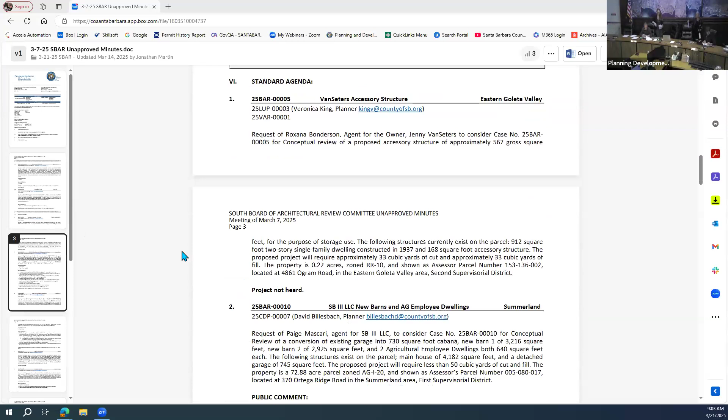I have a couple of comments on item 2H. Let's see, where are the minutes? To read, eliminate 'the way consider' and say it as 'provide overhangs and or shade structure at employee dwellings.' You got that? Is item 2H, comment 2H, right?

So just to say provide overhangs? Yes, just say provide overhangs and or a shade structure at employees' dwellings.

Okay, on item C, 6D, let's see, what did I have here? 6D, again, on 6D, consider eaves or shade element on guest, 6D, on guest house. Similar idea. Instead of incorporate, just consider eaves or shade element on guest house.

And 7E, it's a little bit, the wording is a little bit off. Consider, let's see, excuse me, that's 7E, 7E, 7E. No, from this other side, okay. Yeah, great, yeah.

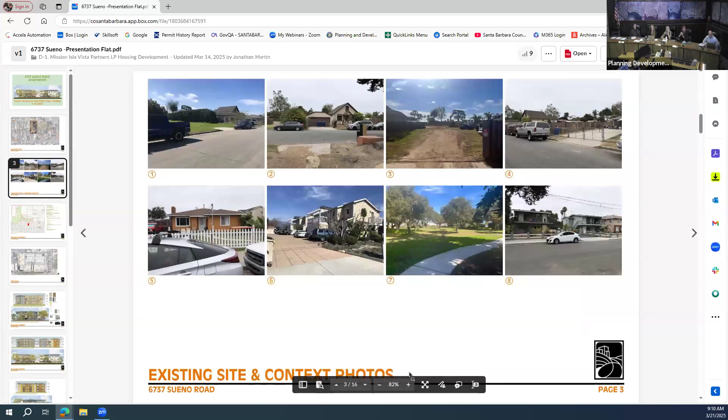Next slide. So here's some photos. The top 4 photos are of the subject property, currently developed with a single-family home and a 2-car garage, and the lot is relatively underdeveloped. If you look at photo 5 in the bottom left corner, that's representative of the scale of most of the structures you'll see west of the property. Photo 6 is a 2-story multifamily structure directly across the street. Number 7 is the park space you'll see to the east of the site. And 8 is further east of the site, 2-story multifamily structures that you'll see on the street.

Next slide. So a little bit of context. The project was submitted in January of last year. A formal application was in February. It was deemed complete 6/28/24. It went to Planning Commission last month. So the project isn't subject to the recently adopted objective design standards since it was deemed complete prior to that. But in this redesign, we have looked at those and tried to implement some elements that we could, to try to make the architecture better.

So the base density of the site is 11 units. It's in the student residential medium density zone. And if we look on the map, it's kind of hard to tell, this is from the city's GIS, but the majority of the properties around it are within that density level. If you get more towards the northeast, you start getting into the higher student residential density zoning designation. You can also see there's quite a bit of recreation zoning around the property. So we are proposing to use state density bonus to get our density up to 16 units. We are also utilizing 3 state density bonus concessions on setbacks, height, and bedroom density.

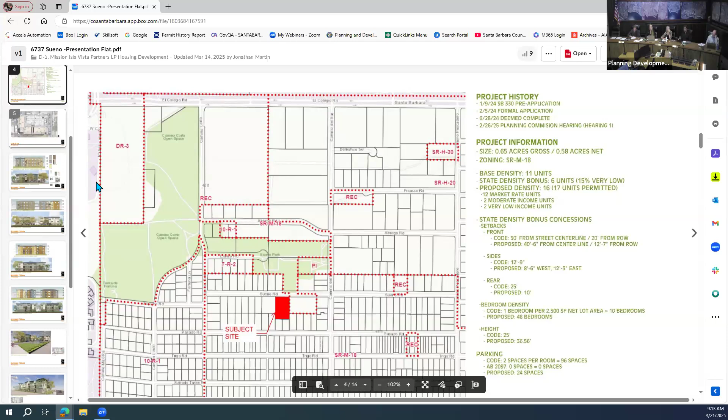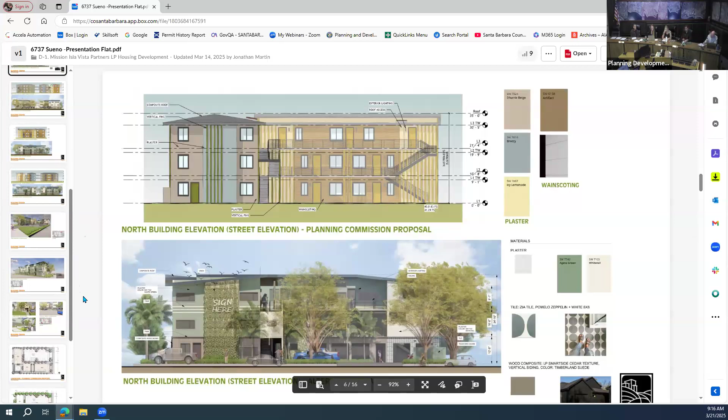This is the street elevation, which you'll see from Sueño. The articulating element that pops out closer to the street was revised to have a green wall element to it.

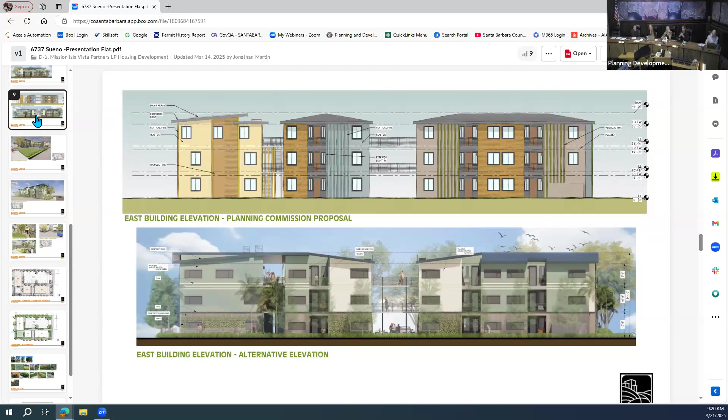You can also see some green wall elements at key gathering areas — in the rear corner there's a green wall element on the wood base material, and also between the two buildings where there are bike racks, there's a green wall element to help soften the architecture. You can also see the ghosted-in trees planted along here to screen and soften this elevation.

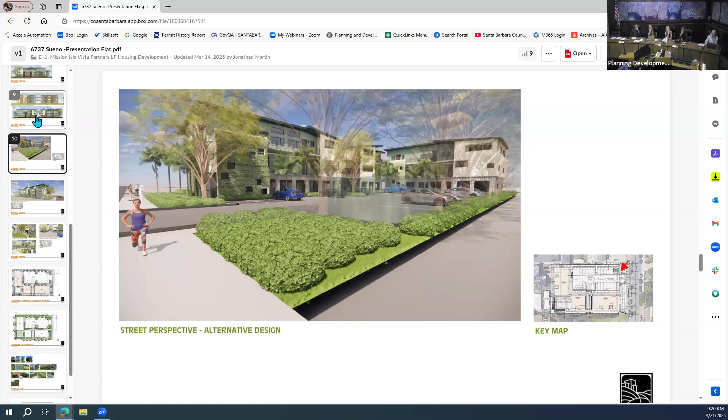And then you can also see a better representation of the proposed design. Next slide.

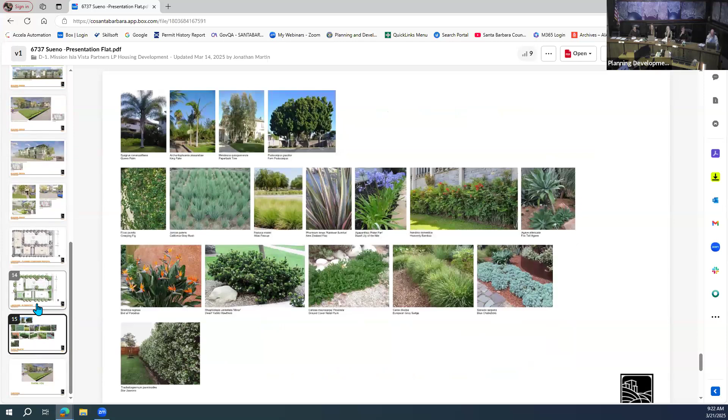So here are images of the plant palette. Next slide. And that concludes this presentation. So we have plans of the original proposal uploaded, and then a lighter plan set of this revised proposal. It doesn't have the floor plans because those weren't really changing in this proposal. So we can go through those if you have any questions.

Sounds good. I realized I didn't read the full project description, so I'll go ahead and do that now, and then the staff memo as well. So at the request of Lonnie Roy, the agent for the applicant, Mission Isla Vista Partners LP, for voluntary review and recommendations of case number 24 DBP 00005 and 24 CDP 00021, the Housing Accountability Act and SB 330 project for the construction of 3 new 3-story apartment buildings totaling 15,213 net square feet. The project includes 16 residential units, all 3-bedroom units, a management office, and will have a maximum height of 36 feet 7 inches, 24 parking spaces, 48 bike lockers, and 52 bike racks will be provided to serve the development. Other site improvements include a trash enclosure, 2 6-foot tall gates and/or fencing, clustered mailboxes, clustered parcel boxes, concrete flatwork, and landscaping. The grading will include 413 cubic yards of cut and 75 of fill. It's a 0.65 acre parcel located at 6737 Sueño Road in the Isla Vista Community Plan area.

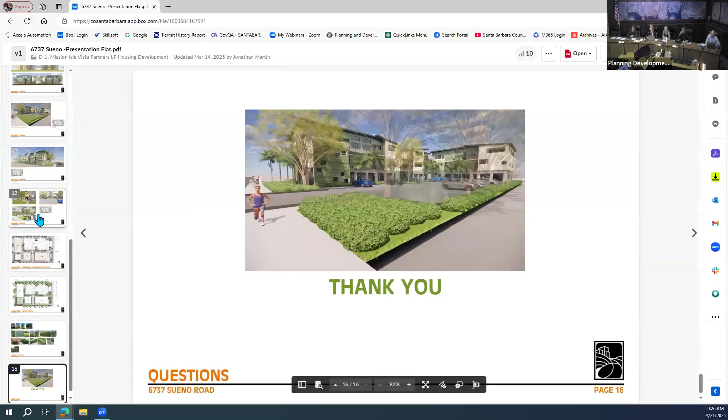So there's two elements. The green wall elements in the parking lot would be a creeping fig, so those would be self-clinging to the wall. That's because it has kind of these random openings, and we thought that material would be easier to maintain for that application. The green walls on the composite wood base material would have some type of trellis element.

And those are proposed as star jasmine. The trellis would be separated from the wall. In the renderings, it's rendered more as like a wire type trellis system.

Yeah, so it would be projecting out a little bit from that material. The base material would be like board and batten, or just a vertical plank. It is proposed as a composite as opposed to a natural wood, just for durability purposes.

Okay, thank you. I have a question. Are you guys planning any type of site walls around the property line, or are you relying just strictly on plant material for the south, east, west? So it's currently proposed to reconstruct the wood fence along the property line, a 6-foot high wood fence, and then we would have plant material interior from that. Okay, thank you. And the next question: is there a plan for a security gate going into the parking lot? There's not.

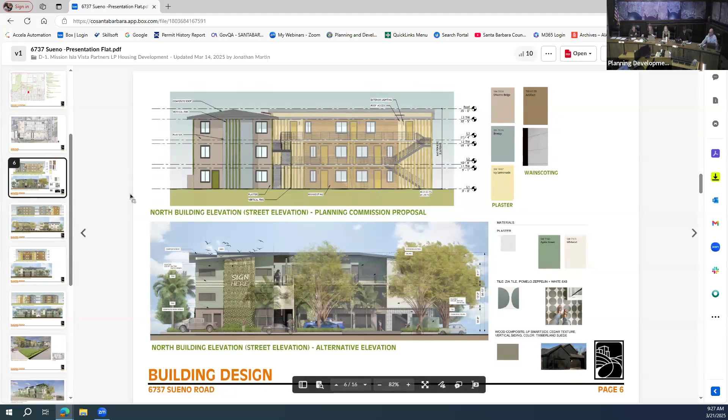I have a question too. Jonathan, can you go to the site plan? So what are the properties immediately to the south? So they're single-story structures, I believe. Single family residence?

If you go to the other aerial, I think yes, I believe they are. And to the west as well. Correct, yeah, so it's single family, surrounded on south and west by single family. Correct, yeah, so that's why we try to put most of the massing on the east portion of the property to kind of separate that as much as we could.

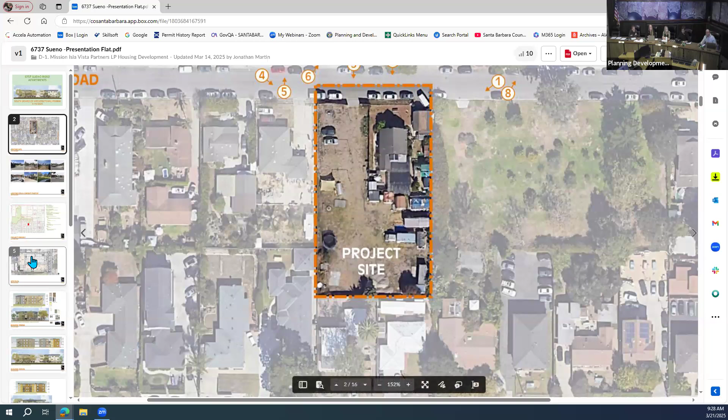Thank you. I have a question. Could you go to the site plan, please? On the south end of building 3, with those concrete walks that go right up against the fence line, how is that space accessed? So you can see kind of the indents there, so there are private patios on those ground floor units, so those would be private patios for those units. So the patio extends into that concrete walk all the way up against the fence line?

Correct. There are planters at each corner with proposed podocarpus there. But that area labeled as concrete walk, is it to be used by the people that occupy the unit with the private patio? Yeah, you're talking about at the direct back, the further south property line? Yes, so essentially it's like a large private space for the occupants of those units. Thank you, just one more question.

Are there other community or public spaces for these residents besides the artificial turf zone that you guys are showing? Is there any elevated areas for that? There isn't currently, no.

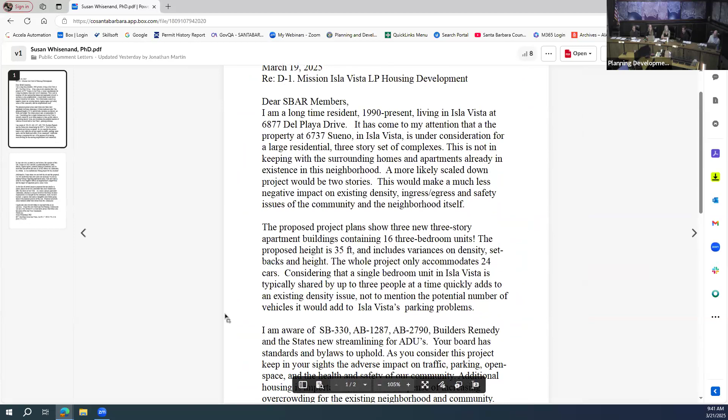Okay, this is Susan Whisenand, sorry. Similar concerns with the height. Scroll down. Keep scrolling. Okay.

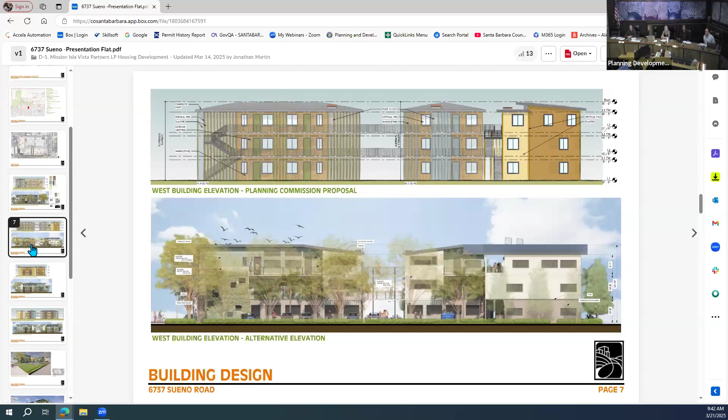Thank you. All right, we'll start with Alex. We only have two architects here. Can we go to the elevations? I think—what is it? Yeah, I do agree that the revised proposal is definitely a better design. It makes more sense. Sometimes it's hard to see exactly what you're showing because of the trees. But clearly it's better organized, more the use of materials—it's just not so much the 60s look that the other one portrays.

If you go to number 7, okay, yeah, if you can blow up a little bit—yeah, go to the bottom part. There you go. Yeah, the base material, I wonder if you ever thought it could be used like a brick veneer. It's not that much more expensive, but it does seem more appropriate. Usually wood is considered weaker or lighter than masonry, than plaster, and sometimes when you see this combination of materials—plaster, and the wood is the one that goes on top—in this case it wouldn't work because it would be a lot of wood. Maybe you may want to use a different base material.

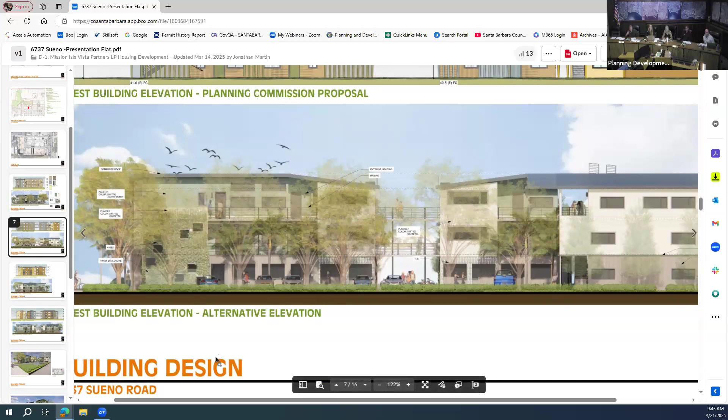If you go to number 8, the next one—where are the vignettes? Where are they? How about where are the ones with vignettes? Let's see, is that one there? Keep going, keep going.

No, maybe they're in the other set. Okay, well, it's the width of on the first floor on this side, you have an interesting stone tile pattern.

I think it's a very good idea. When you have a picture of the side of this building, it shows that colonnade, those pilasters seem weak.

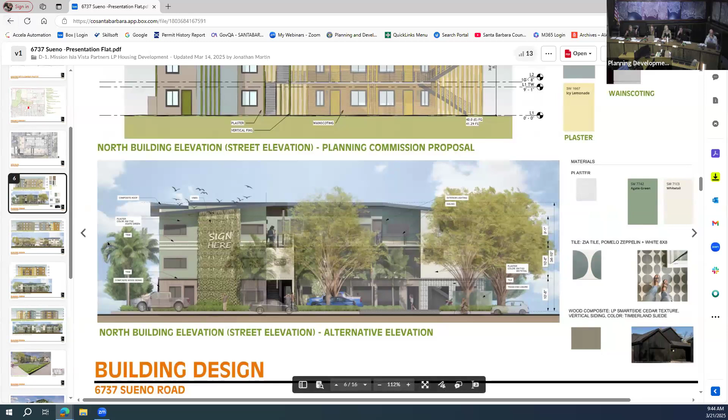It's in vignette number 1 on page 8, but I don't see it here. It's on the other set, I guess. The one that has the... Page 8. Yeah, there you go.

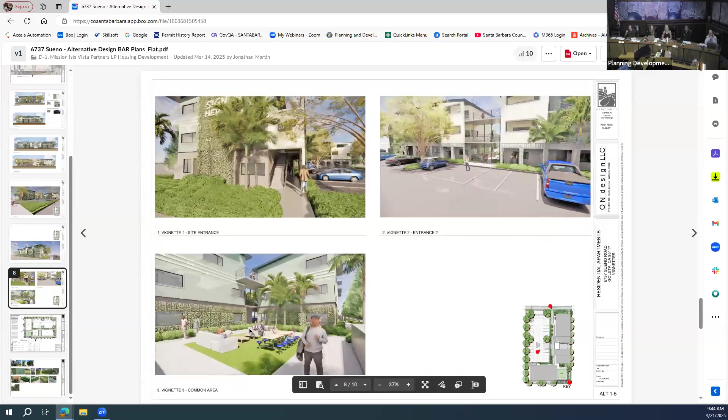Now vignette number 1, if you can blow it up, the first one. Yeah, there you go. You can see how the support of the corner of the building is awfully narrow. It should be at least 12 inches thick, and wrapped in that tile material that you have. I think that would be a nice improvement for the first floor.

Regarding the trees, I'm going to let the landscape architects speak. Maybe Podocarpus and Melaleuca are not the most attractive and welcoming trees for this type of project, but I'll let the landscape architects talk about that.

Let's go back to the elevations, the other elevations please. Yeah, the stripes, the horizontal stripes between the second and third floor, I don't think that they help you. I mean, just as a comment, I think if you lose them, it would probably be better.

The next elevation, Jonathan, let's see what else we have. I kind of like how the windows are organized. It seems like in the one on the left, the third floor kind of went sideways and it's a little bit off, but probably okay.

I'm a little bit concerned that the green element will not remain green through the duration of the life of the building, but again, I'll let the landscape architects handle that. And I think that's about it. That's what I have. Thank you.

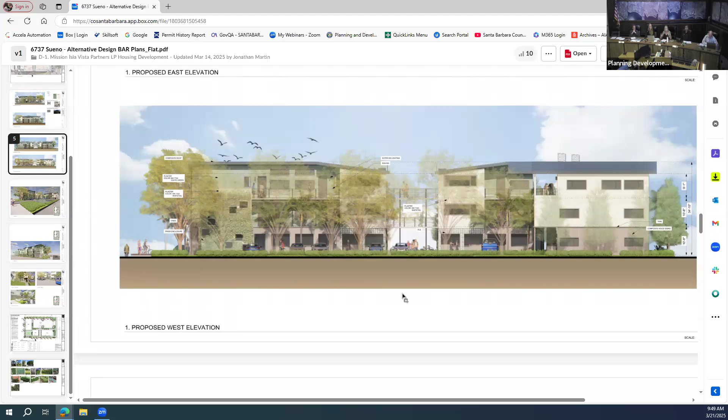Can you go to the other elevation? Yeah, and no, go up a little. Oh, yeah, well.

Yeah, I think it could use still more mixing of horizontal and vertical to try to take away the visual impact of the 3 stories. And is there any way to get some 2-story elements without losing number of units?

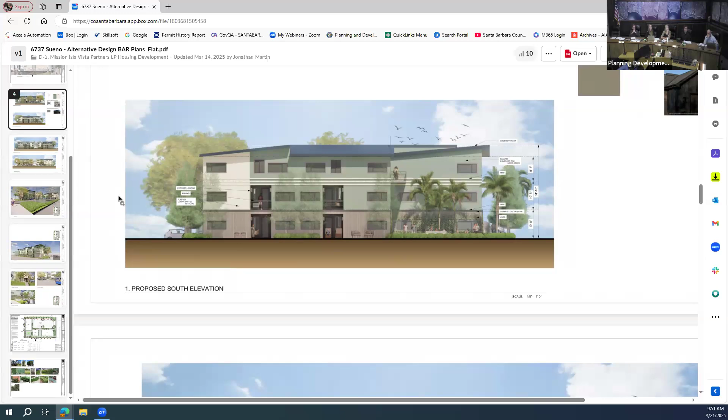As far as the landscape goes, it's a nice palette of plants. I see what you guys are doing. I would think that strictly relying on the property line hedges and a low level wood fence is not sufficient. There's reasons to do a masonry wall or something more substantial for sound, in addition to security and making this feel like it's a little bit more separate from the single-family residential units.

It's a little late in the game to express probably movement of this building, but I'm kind of curious if it was ever studied that that whole back portion was considered to move towards Sueno Road and have some type of pass-through and parking in the back. I'm sure it has been studied.

That is a comment, though. I think if you had some type of pass-through, I would rather, as a resident, see the building on the road rather than in my backyard.

As far as the screening, podocarpus with the pallet is probably an okay hedge material. It has the ability to get really tall. I know there's restrictions on heights, but letting that kind of come up a little bit will help with the scale of the architecture. I agree with the green walls. Plant selection is predominant and who's taking care of those and maintaining them to make sure that they're very full.

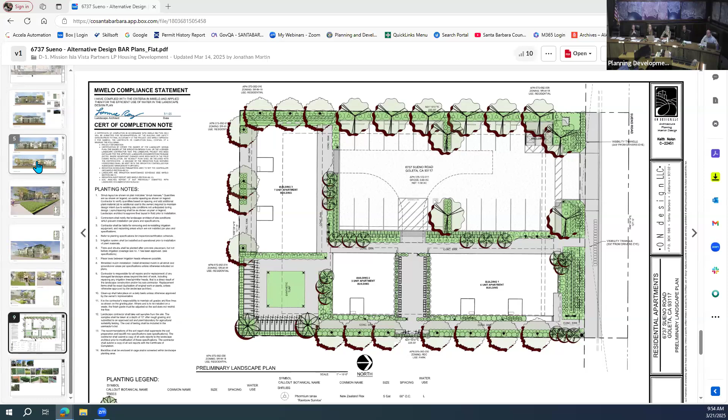Could you go to the elevations there? On that bottom elevation on the right-hand side, that wall that is blank there would not be attractive for the neighbor to look at. I think introducing a vertical element or one of the other elements you've introduced for the rest of the building would really help. But also, if that third level could just step back a few feet somehow, it would at least reduce a little bit of this looming effect of having a third story right up against the neighboring property line.

I'm concerned about how tight the building is to the property lines. You've got concrete walks on one side of the property with planting on both sides, and you're indicating you're going to plant it with podocarpus with a dimension of like 12 feet. I just think it's going to be really tight, and in time the planting is going to be overgrowing the space. That's along the east side, so just make sure all the planting you're proposing is going to fit in there in a way where people can still functionally walk through the space.

Maybe you could go back to the site plan, please. Along that south side that borders up against the neighbors, I think there should be a contiguous line of planting along that entire edge of the property. And I agree with Kier, I think introducing a wall there would probably be beneficial to the neighbors to mitigate the sound. I was asking how that concrete walk gets access off the back of building 3, because I could just see that it would be a nuisance to the neighbors having groups of people right up against the property line.

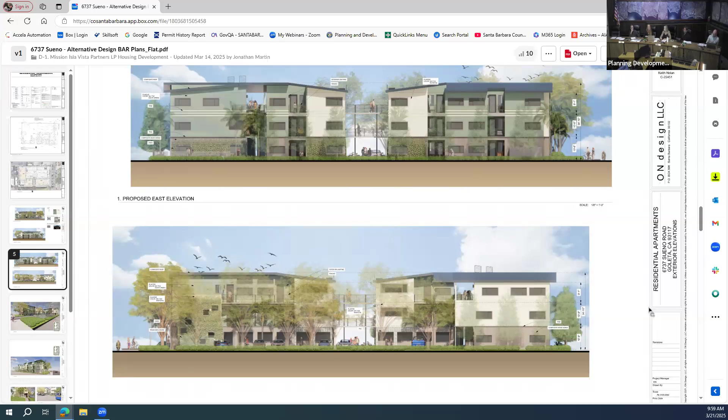If we can go to the site plan for a second. To Robert's point of the concrete gathering spaces to the south of building 3, I am wondering if it's possible to study having them on the parking lot side and potentially dealing with, it looks like you have your infiltration basins

along the parking, which makes sense. But if there's a way to incorporate that into permeable paving in the parking area so that you can, not that I want to minimize the planting, but reconfigure that in a way that the gathering spaces could be on that side. I don't think privacy in Isla Vista in these multifamily units is going to be challenging anyways. And so I don't know that there's a huge value in putting those outdoor spaces for the units on the back, just for the couple units that can access them. I think they'll get more function and be less invasive on the neighborhood, intrusive on the neighborhood if they are on the other side.

This is probably minor, but over the bike storage lockers area, it might be an opportunity to have a vertical trellis element with a vine growing on it to provide shade for the outdoor area, but also to soften the sight lines as you look back towards the buildings.

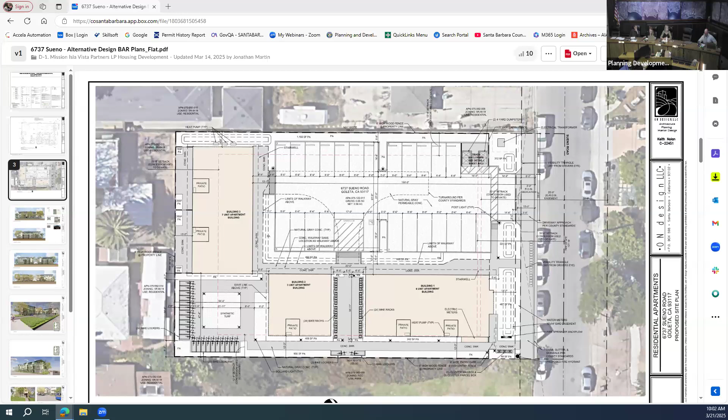Okay, well, I agree with the previous comments, positive and constructive. Do you know if you have any environmentally sensitive habitat, or is it just individual oak protection on the property? It's not an ESHA, there's just that oak grove there and a couple sparse oaks throughout. Okay, so there's not that constraint.

Yeah, I think a site visit will be really telling for us. So, all right, you're here for conceptual review, so there's no motion to be made. We'll schedule a site visit with your preliminary review. Okay, thank you.

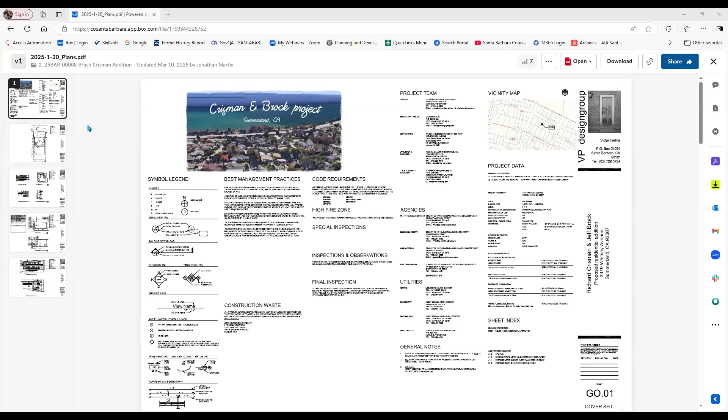As described, these are 2 small additions to 2 bedrooms. The first being 91 square feet to the principal bedroom on the upper or street level floor, and the second addition is 111 square feet to the lower bedroom number 3 floor. The only openings or fenestration that we are requiring are towards the south, or ocean side. Ownership, along with their neighbor to the west, would like to maintain each other's privacy, so there are no openings proposed or desired to the west, only to the south.

Yeah, not much to say other than it's kind of a small infill project with the additions happening over existing framing and decks, if you will. So with that said, my presentation is done.

Good, thank you. We'll move on to questions from the board. Questions? Nope. Okay, we'll move on to public comment. Is there anyone online or in the audience that would like to speak on this item? We have nobody in our attendees column for this item, and we have received no letters. If there's anybody that would like to make a comment on this item, please raise your hand in the room. Seeing none? Okay, we'll close public comment, move on to comments from the board. This is pretty straightforward. So does anyone have any comments?

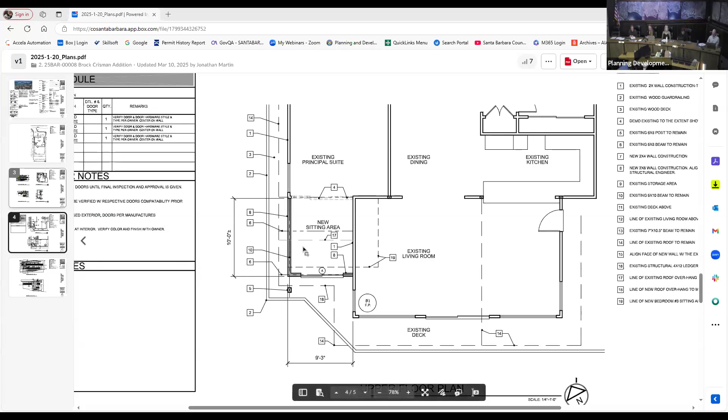I like the fact that it's a solid wall on the side, protects the view of the neighbors and is facing to the south. I think it's well done. Great.

Nope, looks fine. Okay. All right, you're here for conceptual review. I think we can agendize you prelim and final. Does the board feel like it can be on consent? Okay, so prelim, final on consent. Great, thank you. Thank you.

All right, moving on to, that's all mixed up. Okay, item 3, the Barajas covered deck.

Request, oh, is the applicant online? Yes, I am. Can you hear me? Okay, great. Yes, I'll go ahead and read the description.

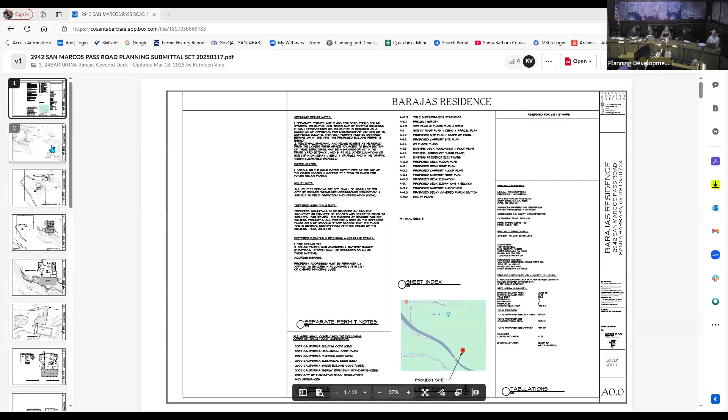Request of Todd Stockwell, agent for the owner, Ralph Barajas, to consider conceptual review of a replacement of approximately 733 square foot deck and approximately 153 square foot addition of new covered deck area for a total square footage of approximately 886 square feet. The following structures exist: a main residence of 2,298 square feet, a guest cottage of 835 square feet. The project will require 1.5 cubic yards of cut and no fill. It's a 4.32 acre parcel located at 2942 San Marcos Pass Road in the Eastern Goleta Valley Community Plan area. And if you can go ahead and state your name and give us your presentation.

Hello, yes, my name's Todd Stockwell. I'm with T-Stock Design Studio. I'm the agent for the owner.

The project is basically going to be renovating and replacing the existing deck square footage with a new deck that's been engineered to today's standards and codes, and then also including a covered and outdoor bar area as part of that deck. That's the scope of the addition. Only the covered porch area is the additional element that engages the existing residence. The deck itself is really just a rebuilding of the existing deck, which needs a little help.

And then the other scope of work is a freestanding solar carport that's over next to the existing workshop. And that complies with the height requirements and distance from the existing workshop. So those are really the two elements of this project. And that's about all I have to present right now. I appreciate any comments from the board.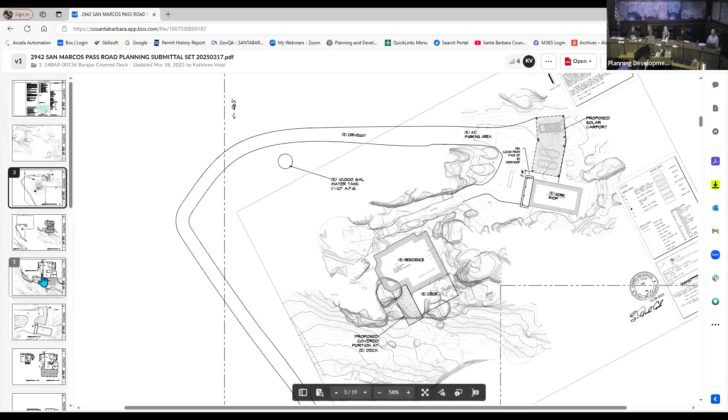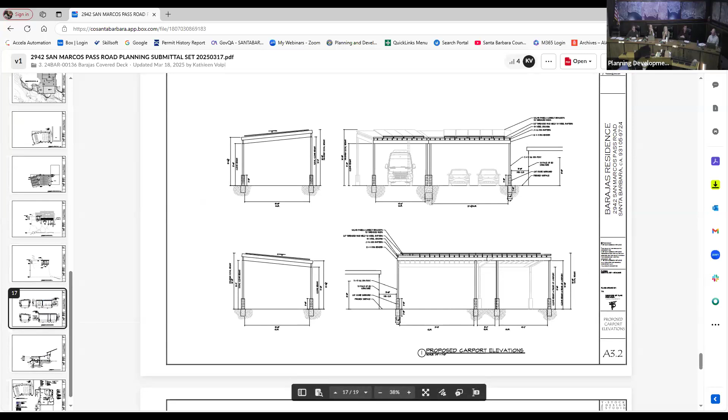Thank you. Move on to questions from the board. You've seen the elevations. That's the existing. Does the applicant know what sheet the proposed elevations just are? Passed it, if you go down for that, it's... That's one of them. Ah, okay. That's kind of looking at it from the boulder view. That's the view from the canyon side, and then the other is a side elevation.

And then that's the solar carport. Any other questions from the board? Yeah, is the project in the high fire area, I assume, right? Oh, yeah. And you checked with the fire department and the materials and all that is compliant? The materials will be compliant for sure. We're just not quite to that point yet. It's going to be fully submitted, and we'll get feedback as far as the materials being compliant.

It looks like there's an underside with the columns. I'm not sure the drawings that, yeah, there you go. Is that covered or uncovered? Will it be exposed fire-wise? What's the story here? That is basically an existing condition where the deck is perched over existing boulders.

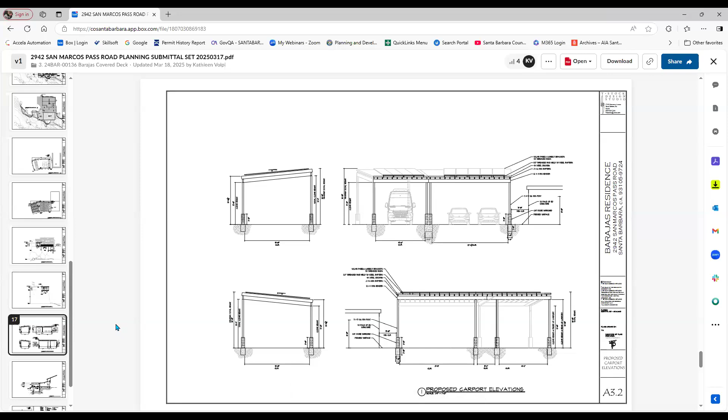And the columns on the carport are steel or what? Yes, the carport is a steel structure. Okay. Great, thank you.

I think that it fits in nicely. I like the use of the Corten steel, it's gonna kind of blend in with all the older materials around there. It's a pretty amazing home, just looking at the photos, the way that thing is really built into the rock, so good work.

Yeah, I agree. I think there's not a whole lot of landscape going on, which is probably a good thing up there with the fire hazard. I think for next time it would be helpful to have site photos. I know it'd be on consent most likely, but it would be nice to have site photos. I think it's really helpful to understand what you're drawing with the boulders, which looks actually pretty accurate from the photos.

So yeah, one question I guess was the guardrail. Is that just a cable rail system, or is that glass? It doesn't look like glass. Actually, that's proposed to be a steel flat bar assembly. So either a steel rod or a steel flat bar, not cable rail. Okay, yeah, but otherwise can support the project.

Okay, I don't have any additional comments. You are here for conceptual review. Does the board feel like they want to see it full board, or can it come back prelim final on consent? Okay, so I'm going to see it on consent.

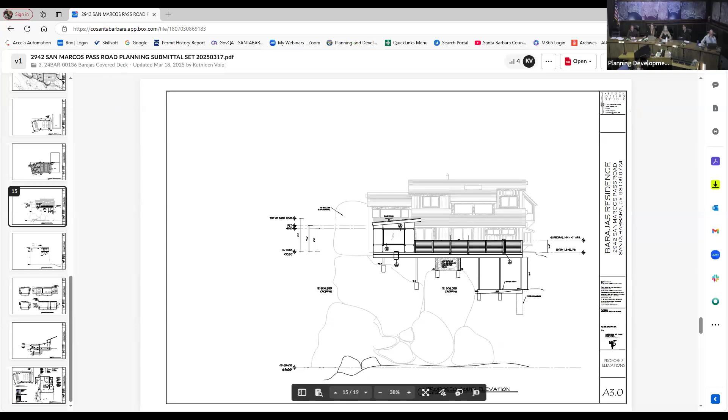So if you can improve or simplify the presentation so it's very clear what you're proposing, because some of those rocks look like, I don't know, a pasta dish with noodles and meatballs or something. So if you can make it a little bit more clean, and also for the building inspector, what exactly is this elevation going to look like? Is the underside of the deck covered or uncovered, or what happens there? Anyway, please bring more photos and better graphics. Thank you.

Okay. Thank you. Great, thank you.

Online, okay. All right, we'll move on to item 4, the Bajaj Trust Addition, request of Heidi Jones, agent for Bajaj Family Revocable Trust, here for conceptual review for construction of a 598 square foot bedroom and bathroom addition and a new 195.5 square foot exterior trellis. The following structures currently exist on the parcel: a 6,077 square foot single family residence, 716 square foot attached garage, a 2,400 square foot shed row barn, a 2,840 square foot horse pen, and horse corrals totaling 6,237 square feet.

The proposed project will require 10 cubic yards of cut and 30 fill. It's located on a parcel that is 22.62 acres, located at 1220 Franklin Ranch Road. And I just wanted to note that I have been to this property and met with the owner, but not contracted with them, so I'm aware of the site.

We can, if the applicant can state their name and go ahead and give us your presentation. Hi, can you all hear me? Yes. This is Louis. Hi. My name is Louis Weiss, and I'm here today at this conceptual review as a design consultant representing the owner of 1220 Franklin Ranch Road.

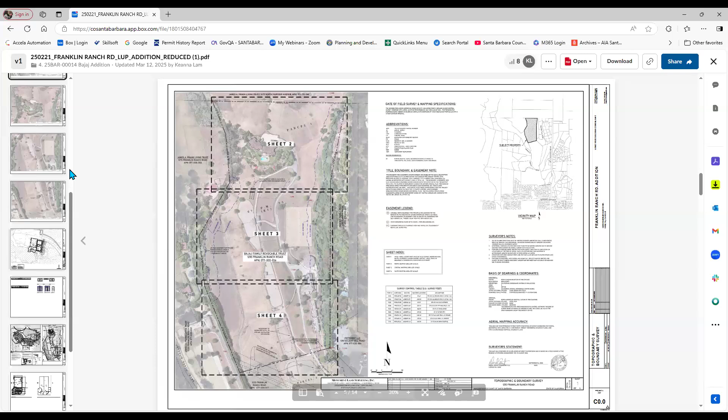The property has many agricultural accessory structures on it that are used for horse boarding, as you can see in some of the survey documents, for horse boarding and training, all of which are structures that have metal roofs. Additionally, the property contains row crops on the western portion of the site. As you can see in the site plan, which is 2 pages down from where you are now, or 3 rather.

Yeah, there you go. The addition to the house is being proposed on the eastern portion of the house on an already flatly graded portion of the site, currently a fenced-in area being used as a dog run. So that's the addition that I'm referencing, the darker gray hatch off to the eastern portion of the house.

The existing trees surrounding the new addition are non-native. Immediately beyond the addition to the east are 2 non-fruiting mulberry trees, an olive tree, a toyon and lemonade berry shrubs. Of the existing trees surrounding the house, 1 non-fruiting mulberry tree is planned for removal.

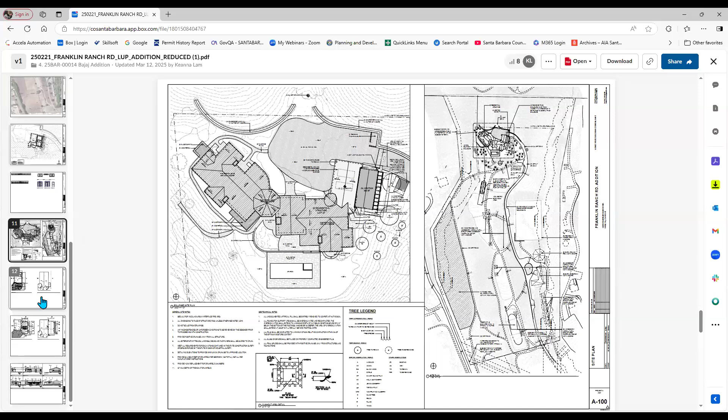The addition is planned to fit in pretty seamlessly with the rest of the house from a stylistic, bulk, and mass perspective. It's 11 foot 9.5 inches tall with a gable roof. You can see that on the exterior elevations if you go down 3 pages. There you go. So I'm showing existing conditions here, and below it, on the bottom row, is the proposed.

The profile of the new addition, as I mentioned, is low in comparison with the adjacent peak of the garage that it attaches to. And since there's no single slope or shed roof in any single volume of the house, a gable roof felt most appropriate for the expression of this addition.

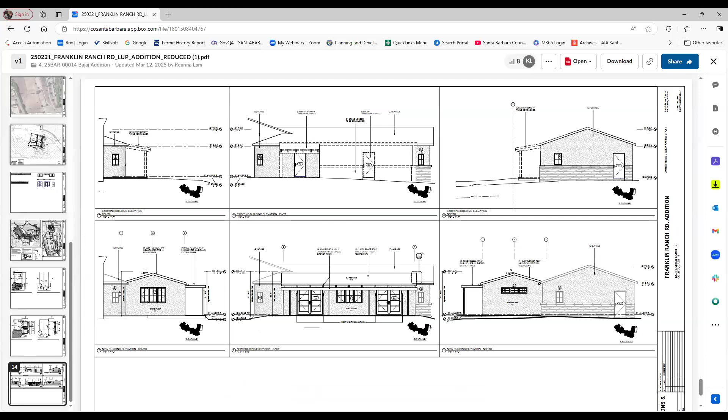And like the exterior of the existing house, the addition will have a light, creamy, tan colored exterior plaster finish, and a Spanish tile roof to match. Access to it will be both through the French doors you can see in the exterior elevation underneath the trellis, those 2 sets of French doors, as well as through the garage and through the existing house. That's shown in the floor plans on the page above. And that's all for my presentation.

Thank you. Move on to questions from the board. Does anyone have any questions? Do you have any photographs of the existing? We did submit photographs, yeah, there should be. Not in this PDF, but I think separately.

Is the planner online for this item? Yes, Heidi Jones here. We did submit an aerial photograph and some site photos. Is the county planner Kiana Lam? Are you online?

Looks like she's there. Can you guys hear me? Yes, okay perfect. I can check the file folders and upload them right now.

Okay, that would be good since they're here for conceptual review. Kiana, any other questions while she's loading those?

A quick question, the wall color, you're just matching the existing, is that right? That's correct, yeah.

We'll move on to public comment and come back once we see the photos. Is there anyone online or in the audience that would like to speak on this item? If so, raise your hand in the chat, or if we have speakers in the room. We have collected no letters, and it looks like we have no comment on this item. We'll close public comment.

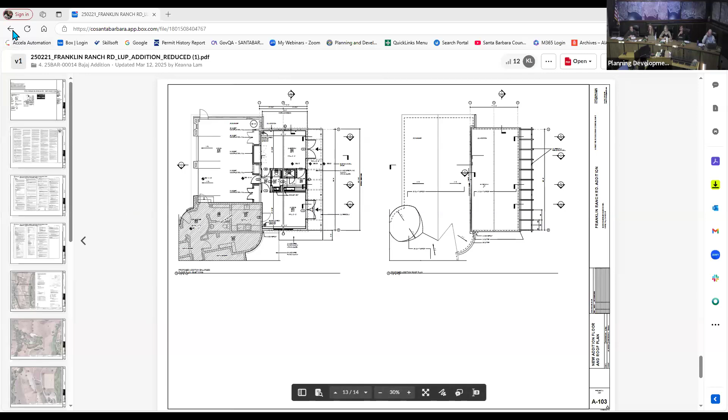Okay, so positive comments, and your agenda is here for conceptual review. It seems within reason this can come back prelim, final, and consent as well. Alex is going to be busy next meeting, and bring photos. Thank you.

All right, moving on to item 5. Does anyone need a break before we move on? Okay, item 5, the Kester Garage.

Request of Gabriel Zamora, agent for Paul Kester, here for preliminary review of a new 775 square foot detached garage, 175 square foot office. There's an existing single-family residence of 4,000 square feet and an ag storage structure of 608 square feet. Grading will include approximately 226 cubic yards of cut to be dispersed on the site. The property is 3 acres located at 1691 Shepard Mesa Lane in the Carpinteria area.

Let's see, it's here for preliminary review. I'll read the previous comments. Plans are difficult to read.

One member commented that the garage doors appeared pinched at the roof line. Return with a landscape plan, include plans that demonstrate more substantial planting on slopes to enhance slope stability and ground the building. Board is willing to accept hydroseeding as a planting down slope of the structure, but needs more detail on slope above structure. Transition between road, retaining wall, and garage needs additional planting detailing. Clearly delineate existing vegetation and what is proposed to remain, be removed, and new. Remove note on plans related to deck.

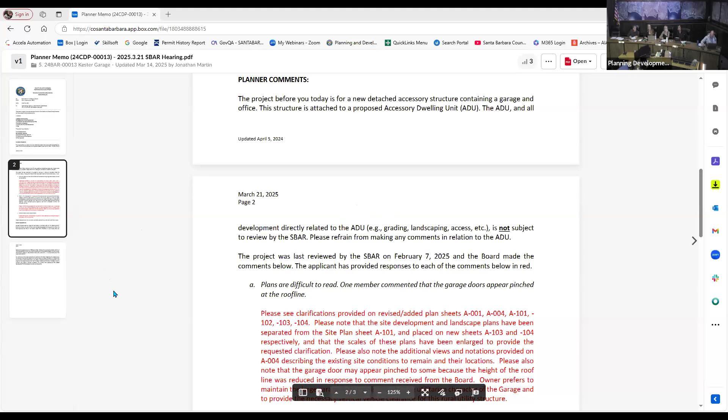The project here is a detached accessory structure. The structure is attached to a proposed ADU. The ADU is not subject to review by the SBAR, we will not make comments in relation to it. The project was, let's see.

Regarding comment A, please see clarifications provided on revised sheets A001, A004, A101, 102, 103, and 104. Please note the site development and landscape plans have been separated from the site plan and placed on additional sheets, and the scales have been enlarged to provide requested clarification. Please also note the additional views and notations provided on A004 describing existing site conditions to remain in their locations. Please also note that the garage door may appear pinched to some because the roof line height was reduced in response to board comments. The owner prefers to maintain the large garage door consistent with the utilitarian character of the garage, to provide the necessary vertical vehicle clearance for this rural utility structure.

Regarding comment B, please note the landscape plan was previously provided on sheet A101. In response, it has now been separated into its own sheet 104 and the scale enlarged. Please also note transitions detailing existing vegetation locations and descriptions provided on the same sheet. On comment C, please note that the note has been revised to correctly describe the landing and steps in the location of the former deck.

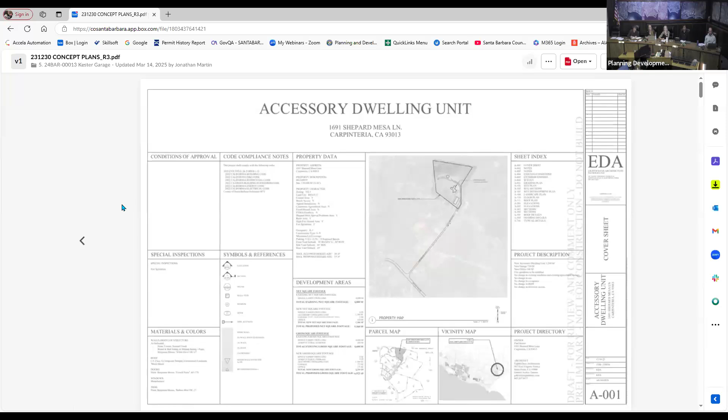You can go ahead and note any, or direct us to the sheets where that additional detailing has been added. Yes, can you hear me? If I see you're unmuted but we can't hear you, maybe there's an issue with the microphone.

While we're waiting, we can look through it. A104 sounded like the most relevant sheet. Here is A004, just go to the next sheet I think. I think we saw that, it was mostly the landscape plan, so 104. Sheet 11, sheet 11.

So in that page, where is the garage and where is the office? Is that the black building? Or is one building the garage and office, and the black building is the one we're not looking at, the ADU? Are you sure about that? Is that... that's the white building we're looking at, okay.

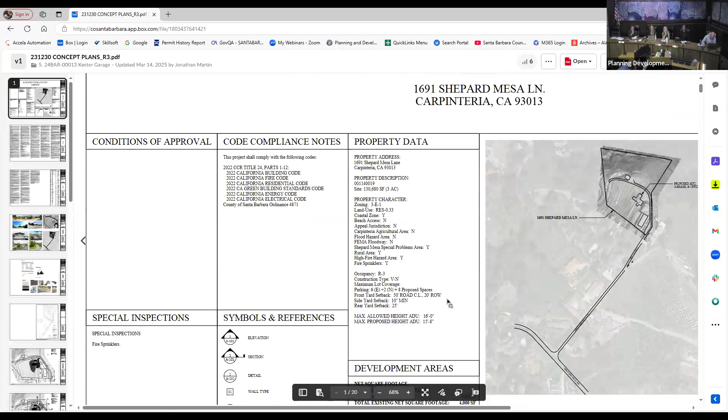So I was just mentioning, maybe for the planner, if you go to the top, the title page. What it says is accessory dwelling unit, that's the title of the project. And the description says garage, office, and ADU, that should be the title name. Otherwise we're approving something we shouldn't be approving. I mentioned that last time, somehow it didn't get through, so maybe the planner needs to pay more attention to this.

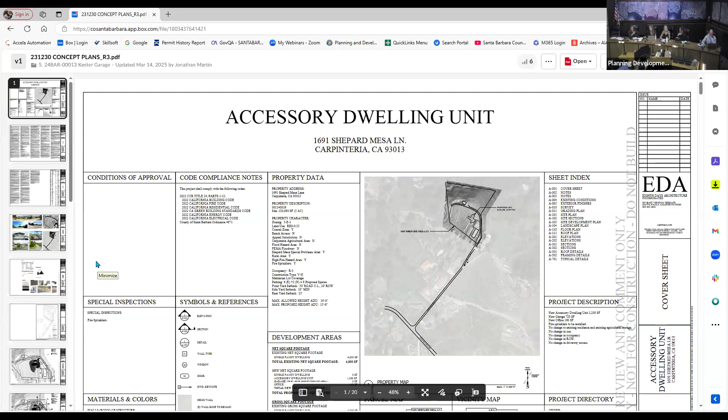And then if you go to the elevation page and look at the garage header, yeah there you go. How do you put a header on that garage door? Two comments in a second. Yeah, it's a question, okay, that's a valid question.

Do we have the applicant? Gabriel, are you able to possibly leave and rejoin? That might solve the audio issues. Are they messaging you that they're not? They're raising their hand that they're available to speak, and they're unmuted, but we can't hear them from our end. Yeah, sometimes.

I mentioned that all these pages say accessory dwelling unit, and we're looking at this, so this is not right.

Can you hear me now? Can you hear me? Sorry. Can you hear me now? Welcome to Zoom for Government, enter your meeting ID followed by pound. Hello, can you hear me now? Madam Chair, I don't know if you guys can hear this in the hearing room, but I can hear the applicant very, very quietly on my end. Oh, we can't hear them at all on our end. I think Jonathan might be on the phone with him. Yes. Okay, well, thank you for patching this together.

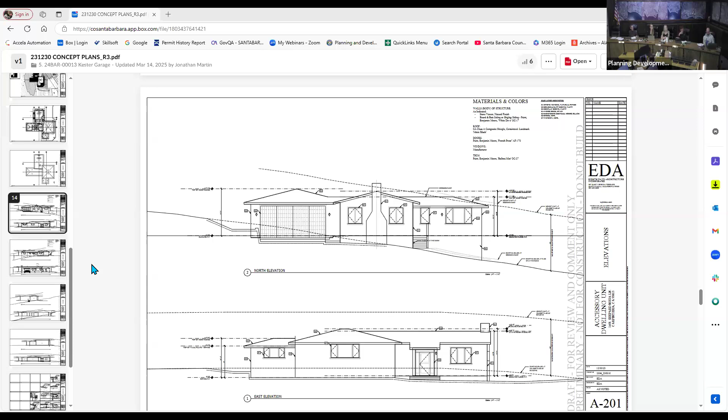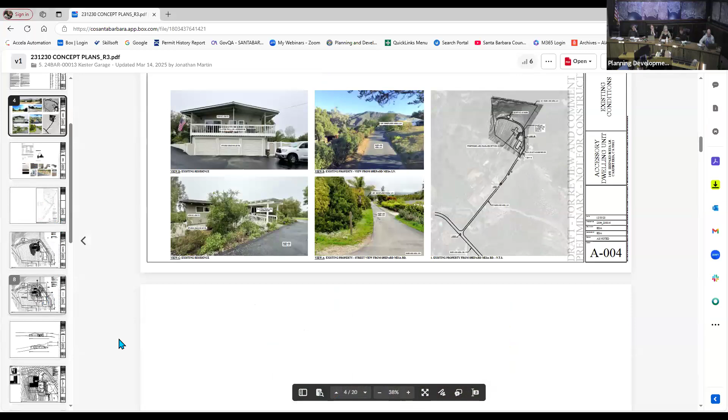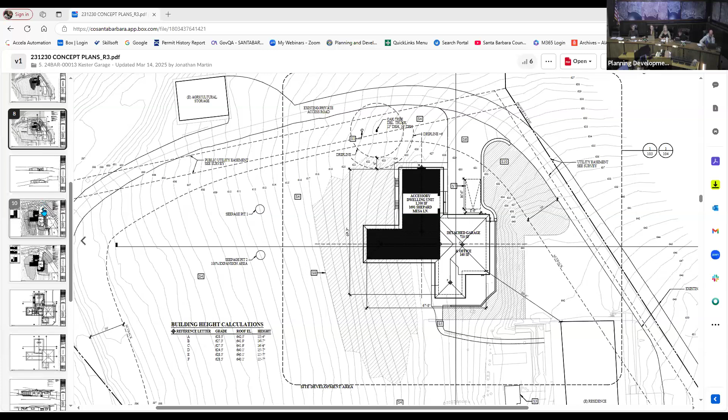Yeah, yes, we can hear you. The access.

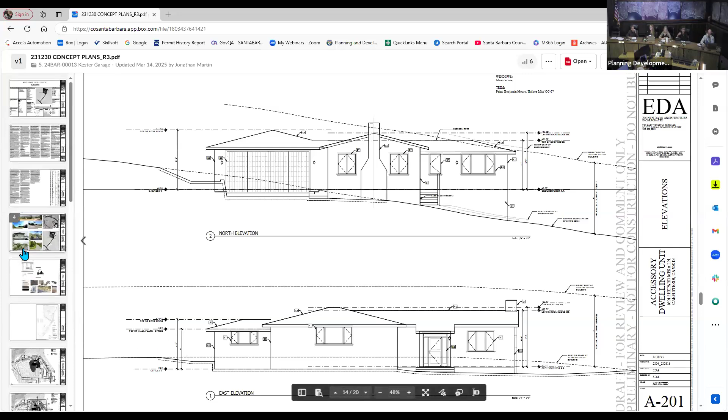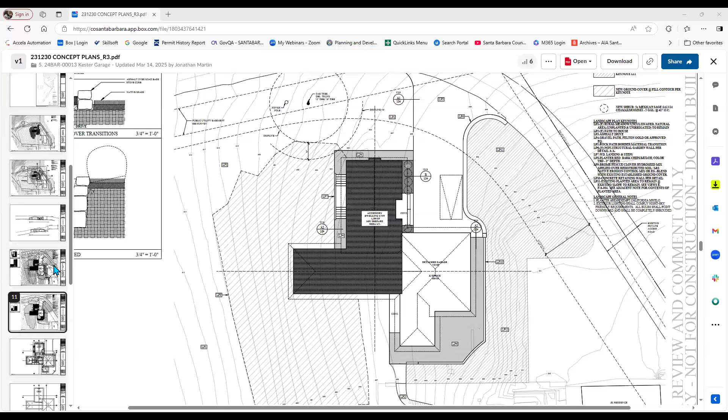It looks like the planting material from the aerial stops just north of the garage face on the north side of the building. I think one of the comments was for a little bit more substantial planting there. It looks like during construction a lot of that gets demolished, and there's probably a 30-foot buffer around the construction zone that will be dirt. One of the comments was to address those walls and show some planting where there is none, since it's still a little unclear.

This is just a hatch, so it's a little unclear what trees are between areas. I think the photos help, and also the outline, but if you return with some actual planting symbols showing what's going on, or even a hatch for a ground cover you're proposing where there's no planting, that would go a long way. Sorry, that's not a question, but...

In addition to the plants listed on this sheet, a little further, are the plants in that hedge that are in that area now? Yep, can you hear me? Yes, thank you, understand that. I think it's just...

Okay, yeah, I think the question's been answered. Thank you, okay.

On to public comment. Is there anyone in the audience or online for item 5? We have received no letters. If anybody would like to speak on this item, please raise your hand in the chat or in the audience. Seeing none, okay, close public comment and move on to comments from the board.

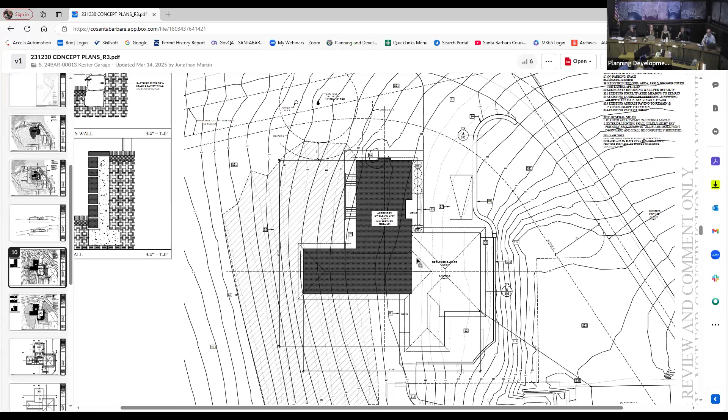Make a motion for this project to come back for preliminary approval to come back for final on consent with additional landscape information showing areas that will be disturbed during construction at the minimum.

A second. Could I suggest an addition? On the landscape plan, could you put in the specific location of the hedge that you kept identifying, draw it onto this plan so that it's referenced? I saw it in the aerial, so I think it would help if you reference that and then show the other area of the planting. We would also encourage the applicant to review a few landscape plans for some standards on existing plant material, which would be helpful for this next round.

Do we have a second with those? I'll second it. All those in favor? Is the condition of the side of the eave detail included, just to see how the header will fit? And all other detailing that's normally required for a final approval needs to be included. Okay, we have a first and a second. Joe, did you get all of that?

We added a lot of things. Other applicant, actually. All those in favor? Aye. All right, thank you.

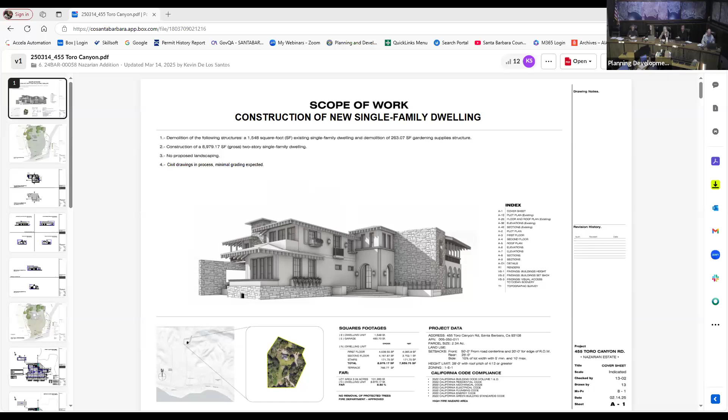Okay, and then under 28 feet. We actually do have an FAR, it was forwarded to our planner. Our FAR for the site is right there, we're at the top. We're actually at 8.81. We have a pretty large site at 2.34 acres.

And we've also, from the last meeting, cut down the square footage of the home significantly, to bring it well under the 10%. You can see compared to the other neighbors, the numbers are all over the board. There's 10s, there's 15s. It depends on the size of the lot.

So another issue that was really brought up was — if you could go to the site plan, please. I know I've been sitting here for like 3 hours, but what's your name right here? Hi, Jonathan, pleased to meet you. Thank you, I'm going to really need you on my side for the rest of this. So, if you could go to the site plan and zoom in a little bit.

You see the red, there's a couple lines in there. There's the purple line that's 50 feet off of the creek. We made sure that we're outside of that sensitive environmental zone. We've also removed the ADU from the overall scope of the project, so we're not trying to do any construction between that line and the edge of the property. We're staying away from that.

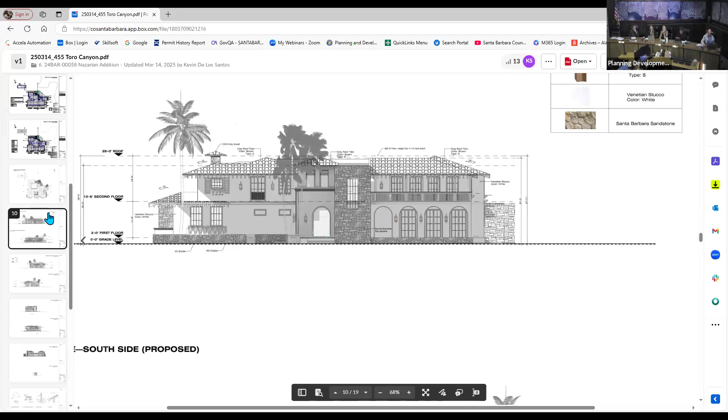Move on to questions from the board. Is there an area of the site plan that shows better how the house is sitting in the terrain, in the topography? Is there something we can see that shows the topography?

Well, the topographic lines are there. Can you zoom in a lot? What's the grade change between the front and the back of the house? Oh, it's very minimal. So you're in a relatively flat area on the property? Yeah, I tried to stay on that flat part of the perch. And then it slopes up to the north and slopes down to the south? Yes.

So I'm on the plateau in the middle of the property. I didn't want to go any further south because it's a really nice property. It terraces down, there's plants, and the owner likes to plant his orange trees and different types of trees. And what's going on in the white square? Is that flat? Yes, that is a flat part of the roof.

So that part will all be at 25 feet. And you haven't done any kind of site sections that show how the house is sitting on the site? Yeah, we have sections as well. The elevations actually tell more than the sections, but here's the sections here.

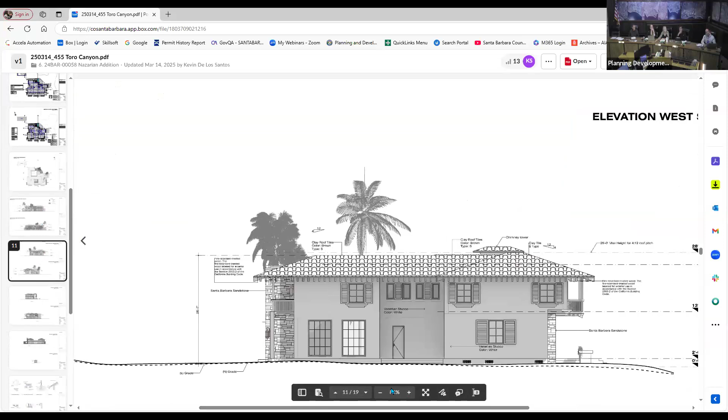Are you saying they're not showing the context of the topography behind and below? Oh, I see what you're saying, right there at the building pad. Yes. Okay, I'm just preparing you for future comments. Oh, thank you.

So how about we zoom in on your neighborhood? I didn't get a chance to study this. Which one is your house? Is it 62? I believe so. This graph was done before me. 11, yeah, I think I am 11. And what kind of visibility do you... yeah, I am 11 because I'm on the right side.

Okay, what kind of visibility do you have to your neighbors? Well, there's a bit of a slope to the north, so I am below him. So 48 and 62, do they look down on you? Yes. And how about 12? 12 is across the creek, and I think they're at a similar level. Okay, and 59 is on the other side of Toro Canyon Road.

Oh, that's definitely looking up. Yeah, because there's a driveway right along Toro for your site. For my site, yeah.

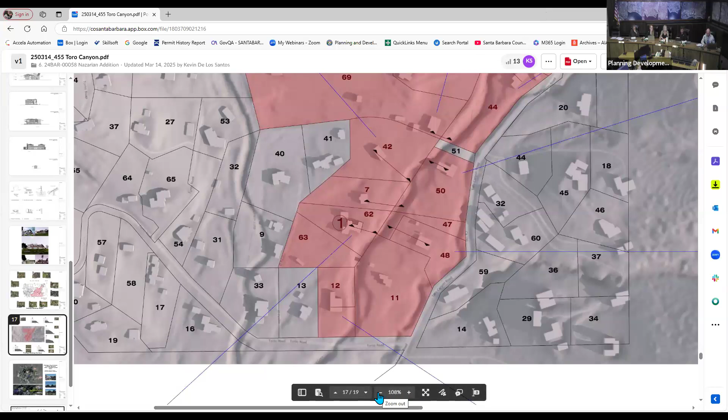Okay, well that's it for questions. Thanks, any other questions? Nope. Okay, sorry, I do have a question. Okay.

I'm sure you've done some view studies from the second floor. Are you guys looking for views out to the ocean from this particular site, or could you describe a bit about what they're looking at up there? Well, a bit of it is views, but actually my client really wants to have the second floor - that's his big thing about it. And he just wants all of those rooms private, separated from the first floor.

Other question is, has this been reviewed at all, are you guys doing any major adjustments to the driveway at this point? Oh no, we're not going to touch it because the driveway works, we'd love to not touch the driveway. Has it been reviewed by fire at this point? No, I could talk to fire about it though. So yeah, I do not want to touch that driveway at all. It's one of the best parts about the property - when you go up and drive up, it takes you away, kind of.

Okay, yeah, up at the top. As you go up, there's actually a section. Can you go to the site plan? You can kind of see it a little bit better. I would just go ahead and have that meeting in. Yeah, you can, because there's a slope requirement and they don't want anything to change, and they're not going to be able to make that first turn.

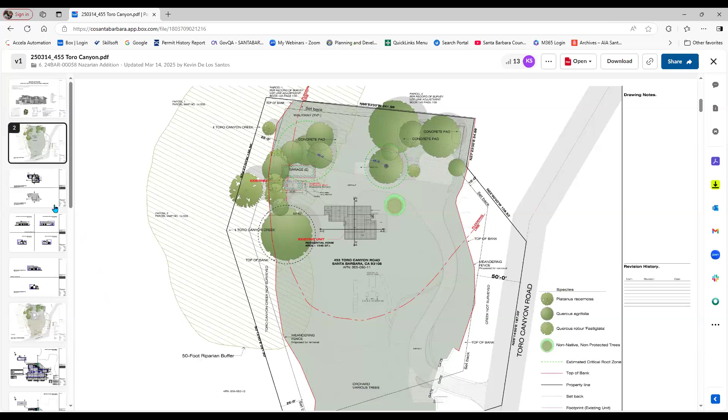Okay, please go ahead, Kevin. I just want to say there's site photos in the folder that I think show the site layout from the driveway up and across the project site, and it'll show that flat area where the driveway is, if you want to check those out. That's why I don't want to touch that driveway.

It's kind of a comment question, but I think you're probably going to need to get the trees added to your survey so that you can identify whether you're impacting them. Okay, definitely.

Sorry, someone else had a question too, if you don't mind. But is there a developed landscape plan or any strategy on how you're going to integrate the structure into the existing site? Actually, we have, I've started approaching some different landscape architects. That'll be in the next phase.

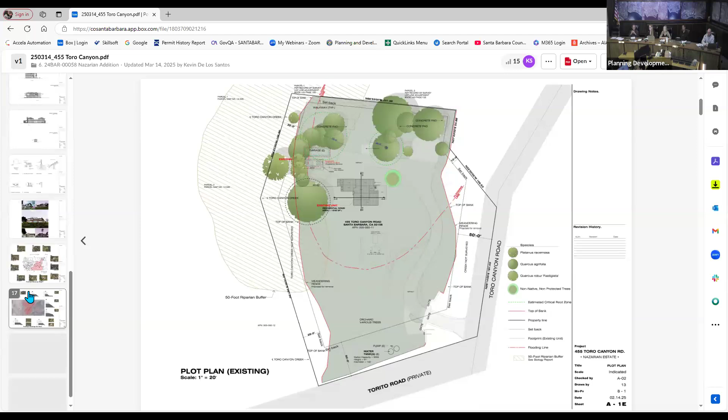Good morning. Let me reintroduce myself because we've been here before, probably remember me. I'm Lawrence Dorett. I'm a physician, and my wife and I have lived in Toro Canyon for over 20 years, and Mr. Nazarian has been our neighbor for over 10 years. We will say right up front that because of your board's feedback on October 4th, the new architect has come up with a plan. Mr. Orsich, you're to be congratulated on that. That's definitely heading in the right direction, not only with the materials, but the design.

And we're really grateful for that, and we want to be clear that we're not trying to deny Mr. Nazarian his right to improve his property. We're merely asking that his renovation be reasonably sized in the context of the ecologically delicate, semi-rural neighborhood that we live in. And unfortunately, this new design is still way out of proportion for the Toro Canyon neighborhood, and it contradicts the intention of this massive Toro Canyon plan that the county spent a fortune on, which we hope will continue to be the benchmark for development. I just want to focus on size, because keywords in that plan are bulk, size, and scale.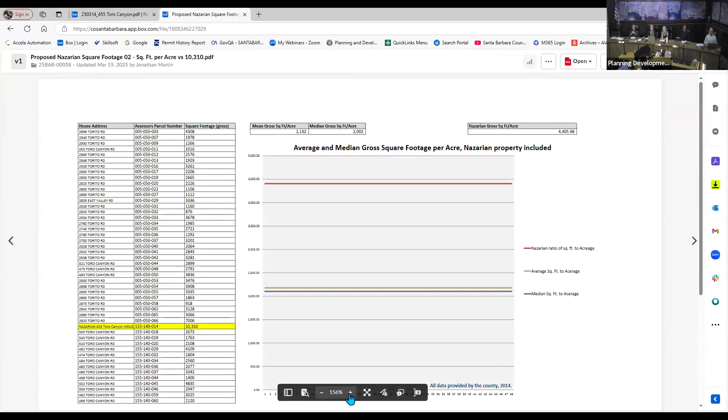And as I mentioned here on October 4th, Jonathan, can I get my slides up? The two slides, yeah. I mentioned here, these slides are based on 2014 county data, and there really hasn't been that much change over the 20 years we've built here, so they're still pretty accurate. These are 49 houses. They're a neighborhood. They're an integral part of Toro Canyon.

Back on the first meeting that we had, where we just came ourselves, the architect unfortunately couldn't make it. The house was a mansion of 10,300 square feet. Then on October 4th, it jumped to over 12,000, this mansion, over 12,000 square feet. Now we're down to a mansion of almost 9,000 square feet. And while there's no ADU in this plan, in the last plan there was, and let's say they could build one. So we're going to assume and go with that 9,000 square feet, because that's what Mr. Osich has presented. If you see on the slides, the average square footage of all these 49 houses is roughly 2,752 square feet, and 9,000 is way, way above it. That's 10,300, but you can drop it a little bit and you can see it's way out of scale. And so you might say an important factor, as Mr...

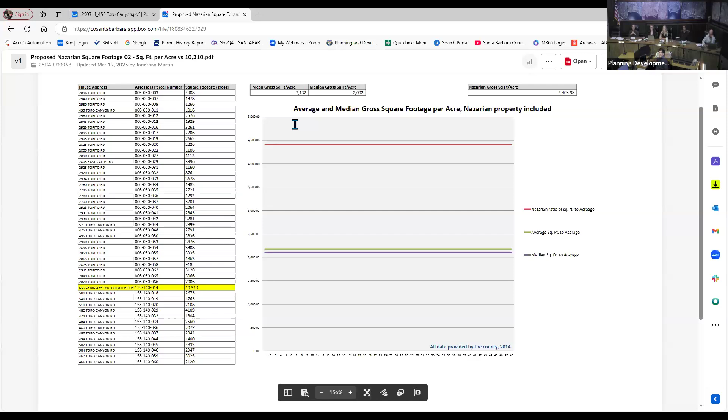Osich mentioned that they have 2.34 acres. So let's look at mean square footage per acre for these 49 houses. It's 2,132 square feet, and his comes out to 9,000 square feet. It's almost double that at 3,800.

Please wrap up your comments. Oh, let me wrap up. Sorry.

I only ask that you put yourself in our shoes. This is a special neighborhood. We'd like to really see it preserved. This is a 9,000 square foot mansion, and it really violates the spirit and the letter of the plan, and would set a terrible precedent. And I'm asking - no, let me just finish. I'm almost done, really. Thank you.

We would ask that you put up story poles because we have a direct view, and we ask that you deny this exemption for the ridge line. And we also ask that you please visit the site because you'll have a better idea. There are a lot of our neighbors who just found out accidentally about this meeting last week, at the end of the week. A lot of people wanted to come, but they had family and health issues.

We understand, so you have a bunch of letters. Yes, I hope you'll take the time. And I want to thank you, not just for your time today, but for your public service, for being a member of this board. Thank you, it's really moving.

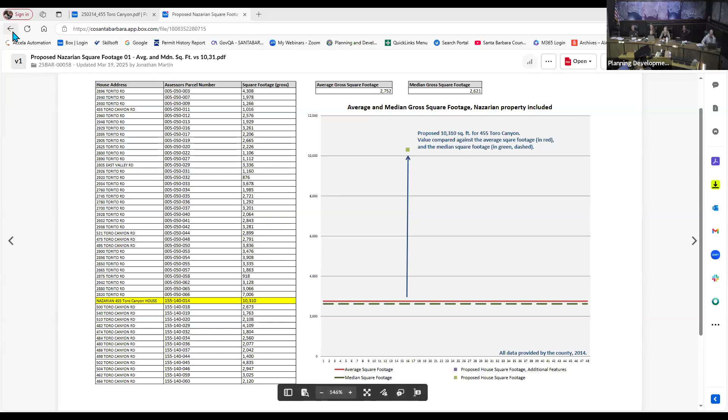Are there other two-story houses in the immediate neighborhood? Yes, and I think the architect provided some information about that. As I looked, it was tough to see from the aerials, but most of them appeared to have pretty steep pitched roofs versus flat roofs. So yes, there is a mixture, but I think Lori's slide also demonstrated that although there are other two-story homes in the area, the size of those compared to what's proposed with this project is vastly different.

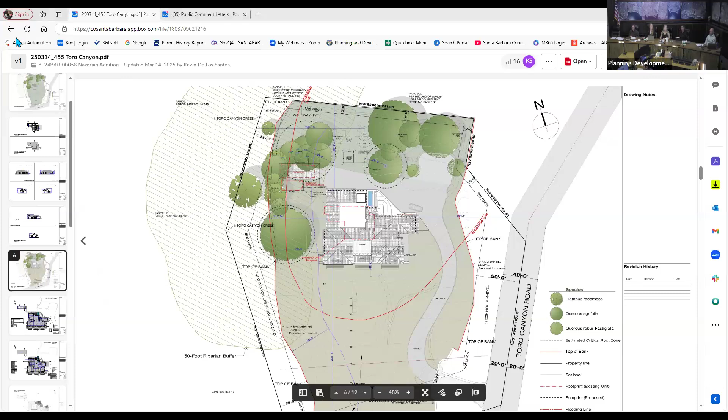Cindy Davidson: similar concerns with the size. Size concerns and spirit of the Toro Canyon Plan. We've reviewed those.

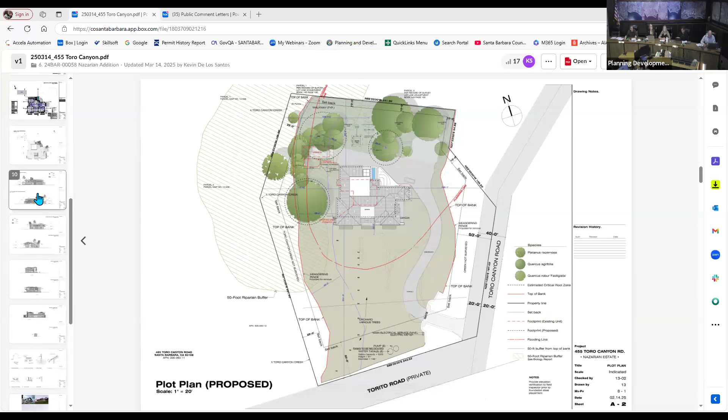Santa Barbara has a very particular, special, and honored mission revival style, which is very clear. I hope you have had the time to go to the courthouse across the street, which is really beautiful. You can take it, and that is for us the Spanish colonial revival.

And there are some things like the tile - I saw the detail of the tile. They have a one-piece S-tile, color brown. That is not acceptable. It's a two-piece mission tile. I usually put on my plans to match the courthouse, just to make sure it's a single color. It's not, it's very simple - two-piece mission tile to match the courthouse.

Another thing is the stone pattern - we have a sandstone, and it's not that pattern.

I mean, you may want to pay attention to the courthouse again, or to some other buildings in town. The third one is the overhangs.

If they are, they are details, but that's not the way overhangs are done in the mission style. Usually they're consistent, all the same size, like 24 inches, 18, or something like that, except where you want to protect especially from the sun, where you break the pitch and have maybe a Monterey style porch or balcony. And this doesn't have it.

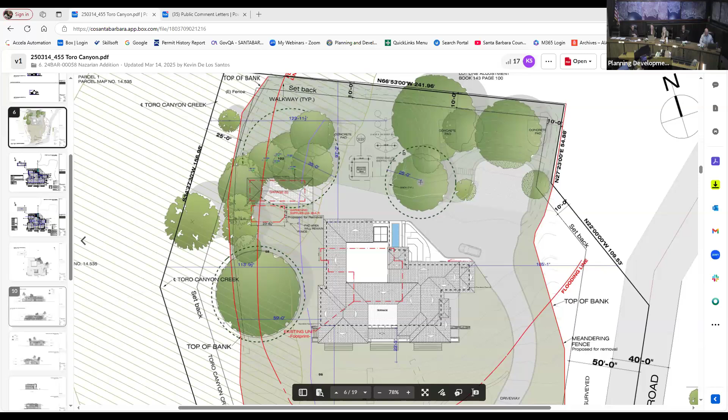There's qualities of this elevation that I think start to capture what might be appropriate for this area with the Spanish styling. You've got the arches and the introduction of the stone, and on the left-hand side, it's nice the variation of how the first and second story break down.

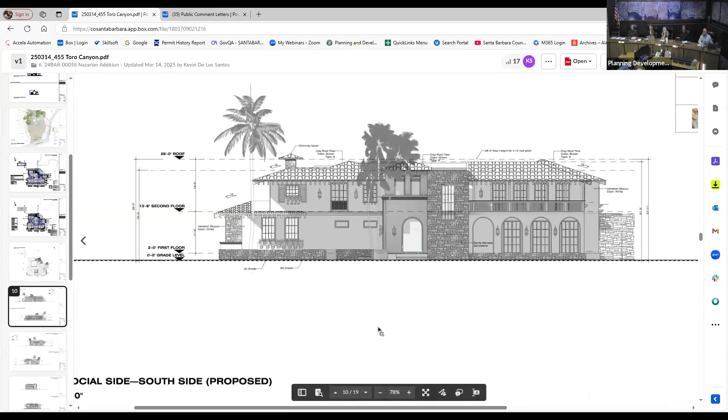But if you could zoom down to the other elevation, it almost feels like a completely different house to me. I would study that this house has some cohesiveness in the architectural detailing, because I don't see any of the arches on this side, and Alex's pickup on the stone detailing is off—you just don't see it in this type of house typically. I would look to you, with your landscape architect, to figure out how these patio spaces on this side of the house fit in with the architecture. Right now it's kind of just split up in a way that makes a bunch of oddly shaped spaces that I don't really understand how somebody would use.

Could you go down, please, to where they have the 3D renderings of the project?

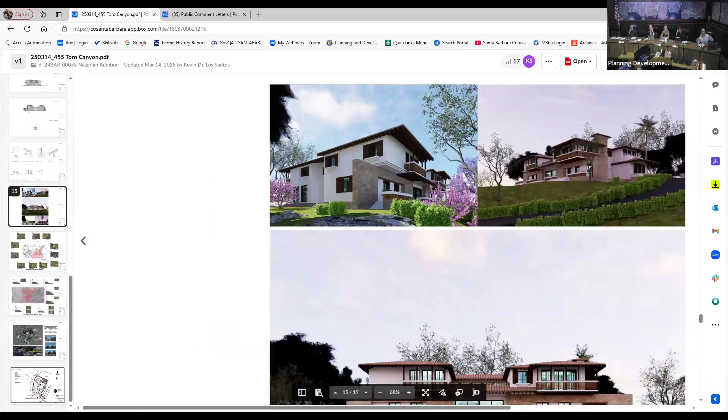If you look at that top left rendering, to me that's kind of a modern detailing thing, having the piece of stone coming out underneath the upper level, and it's kind of awkward how there's this cantilevered architectural feature. I would think there'd be posts in there, and it seems like there's some detailing missing. I don't see where the detailing is here that necessitates the exemption to get a height limit—an excessive height limit that doesn't fall within the requirements.

I also agree that this house just seems kind of out of place in this neighborhood. I was looking on Google Earth to see if there's any other homes that kind of match this, and I'd suggest looking at 420 Toro Canyon Road. I think that property starts to capture some of what you're talking about or maybe trying to go after—you can see it's nicely designed with how the landscape integrates into the layout and footprint of the house, and that's what brings a cohesive package. I just don't quite see it here at the moment.

You might be able to zoom out, go to the 3D view from the sky kind of thing.

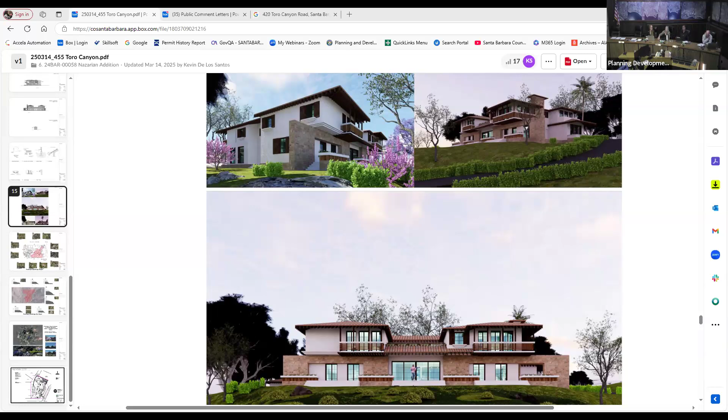We go and do the site visit with maybe some basic story poles, mapping sort of, and then continue on the process. But for you, understanding that the design has to be really good for it to get that exemption, and there has to be a tremendous amount of data provided by you to argue your case. And things like the ceiling heights, I think I saw they're really high, so you can help yourself with that.

And just to help you inform your client, I think one of the big things to do is build a constraints map of all this data. So if you have bio constraints, the hillside ridge line, the oak woodland, fire - basically creating a really clear map of what you're up against with the site and then building in from there, instead of right now we're just guessing at what your issues are going to be from experience in Toro Canyon.

Well, I did hear what some of those issues were at the last meeting, and that's why I right away got away from the creek and brought down the height, and started addressing at least some of those issues. But a full civil plan - I'm going to contact the owner and get that running, because no matter what, that's going to have to happen, and an arborist. So that'll be our homework right away.

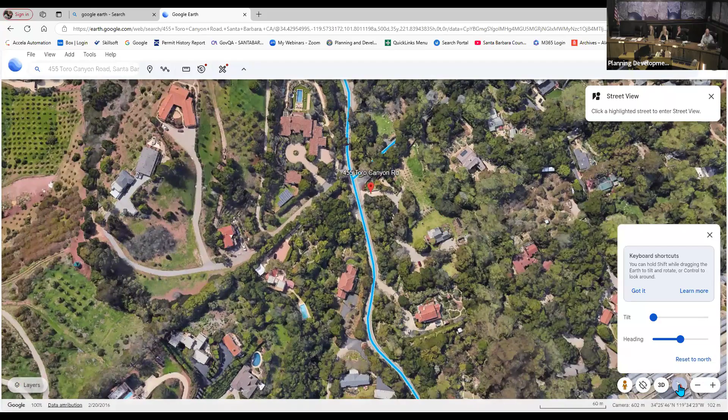Can you go back to the aerial for a second? Just rotate it a little bit so you can see. And can you see my neighbors as well? You can see behind me, directly behind me, there's a 2-story. And just over the edge, there's that white 2-story up the street. 2-story is not unheard of.

We can't open up conversation, but I'm just pointing out the difference. Yeah, so the hillside ridgeline doesn't apply to every property. It's based on the slope that has the 16-foot fall per 100 feet adjacent to your development. So not every parcel adheres to that.

Some structures might be grandfathered in. But most likely, if a new structure has been proposed or built in this neighborhood, it either didn't meet the hillside ridgeline requirements or it had a small exemption. And that's an important thing for you to delineate on your site too, where that 16-foot drop in 100 occurs in relation to your building.

Also study all the neighboring homes around there to understand how that's working with the neighbors, if there are any. It would help if you studied the neighboring homes around there, so you can bring some context to your plans on how this fits into the neighborhood, so you can defend it.

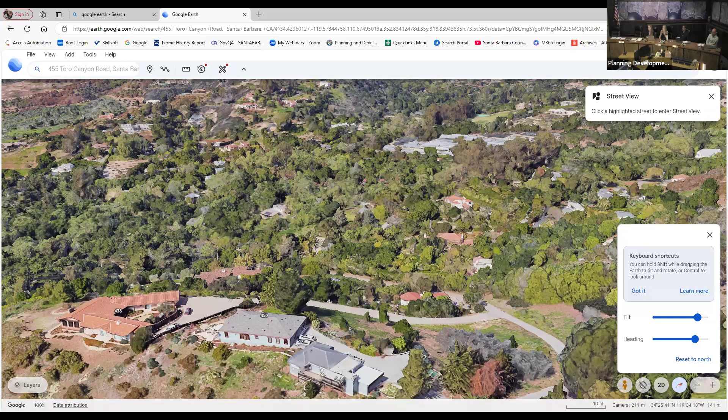I think we'll leave it up to you whether you want to story pole it at this stage. You most likely will have to story pole it when you get to preliminary review with a more finalized plan. But if you want to give us some guidelines to help, just corners and things to give us a sense of where to look when we're out there, and how high up it's getting, that could help. But normally we require the story poles at preliminary level because that's when your ridge lines are set and you're ready for approval.